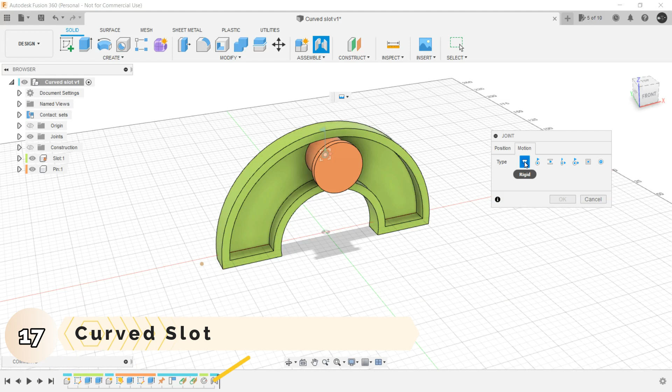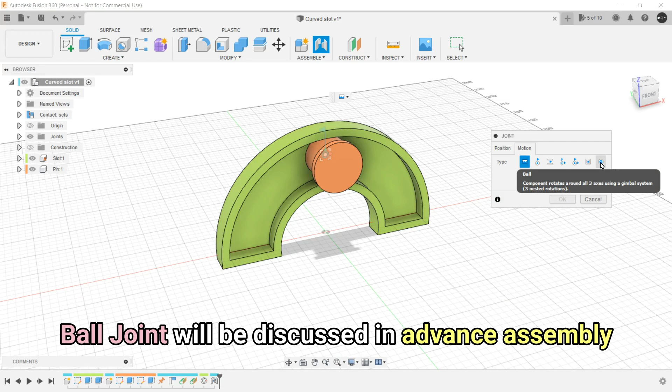So far, we have understood about rigid joint, revolute joint and slider joint while creating some basic assemblies, and then we understood about cylindrical and pin slot joints while creating some intermediate assembly. In the same regard, we are going to understand the planar joint and the ball joint. This ball joint will be covered in the next section where we deal with some advanced assemblies and advanced concepts of assembly in Fusion 360. So let's begin with this one.

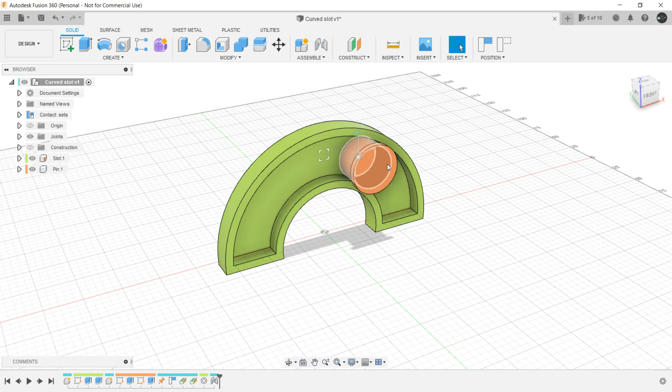As you can see, we are having a curved slot in which a pin is attached which can move in the slot only, and it cannot go outwards of this. So we are going to use the concept of contact set again here.

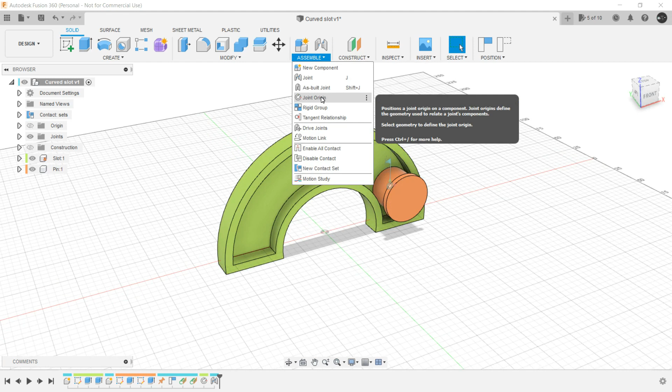Now in this particular lecture, we are not only going to understand about the planar joint, we are also going to understand about one new concept, that is how to create a joint origin. So let's begin. Let's create a new design and a new component.

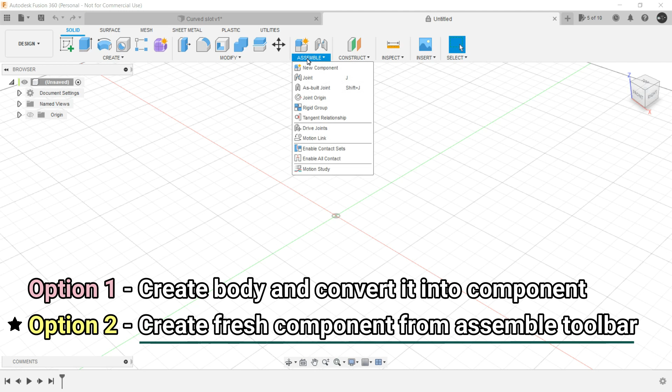I always start with a new component from the assemble toolbar. I can also do it by creating a body and then creating that body as a component, but this is more convenient, more prominent, and more efficient. That's why I use this, and most designers use this method only. They create components, a fresh component from the assemble toolbar. So let's create one. Let's name it slot.

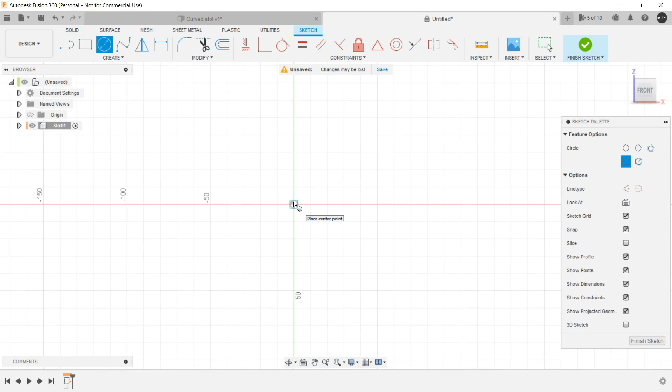Now we are going to create this curved slot first. For this, create a sketch in any of the vertical plane. Then create a circle of any dimension, a bigger one, followed by a smaller one. Then invoke the line command, trace the origin up to the intersection point that we are getting here with respect to the outer circle, and then just close the region.

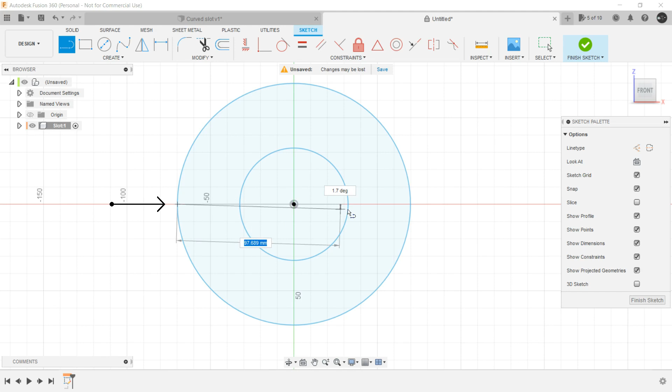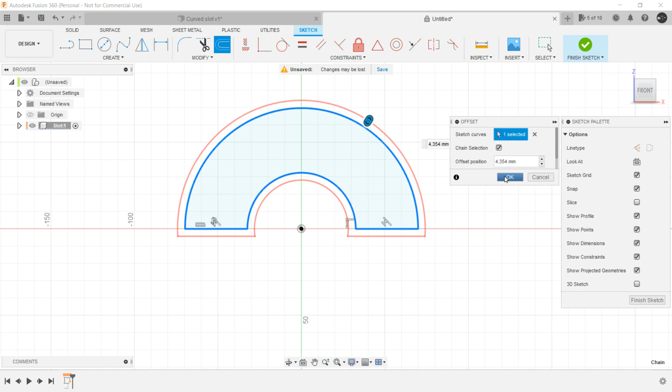Let's trim the bottom area, and this one also. Invoke the offset command by clicking O on the keyboard and just offset this profile that we have generated outside, and click OK. Now finish the sketch, select both of these regions, press pull, push it outwards to any dimension, and as you can see the sketch is gone.

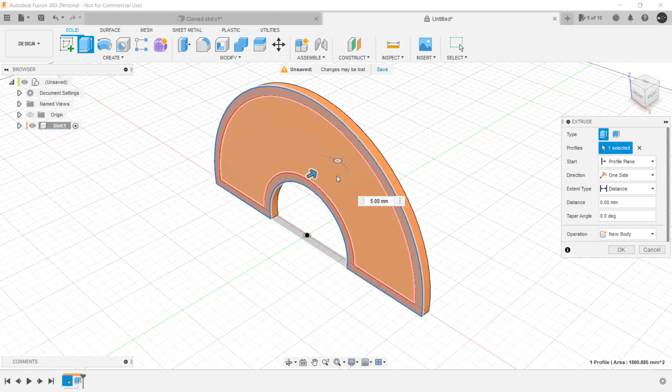So what we will do is show the sketch from here, from the browser. Now select this outer region, press pull, this time here, and the operation would obviously be join. Now just hide the sketch and our slot is ready.

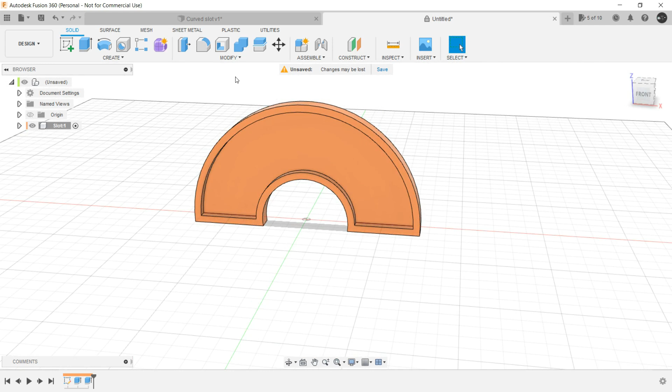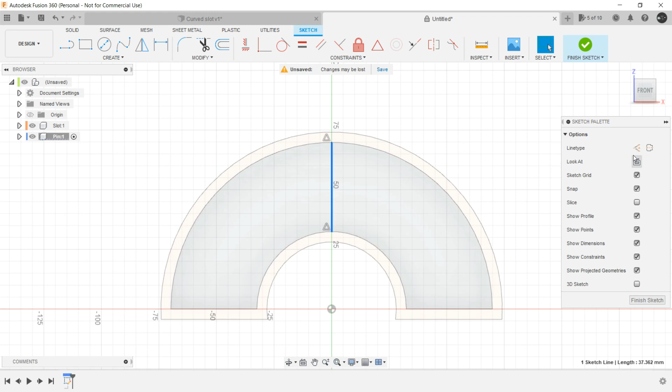Now we need to create a pin over here. For this, again activate the assembly, create a new component, let's name it pin. Select this particular surface, create a circle. Let's first create a line from this midpoint of the curvature and this midpoint, and convert this into a construction line, and from the center of this let's create a circle.

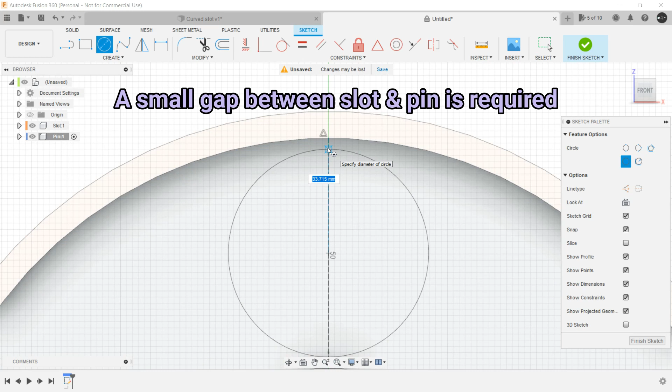As you can see, it is snapping to the point with the outer diameter of the curved slot, but this is not desirable. We need to make it a bit shorter. The reason is we need to have play in between them, otherwise it will be stuck. So it is like 37.362 millimeter, so we can make it like 36 so that we can have play in the upper portion as well as in the bottom portion. Click enter and finish the sketch.

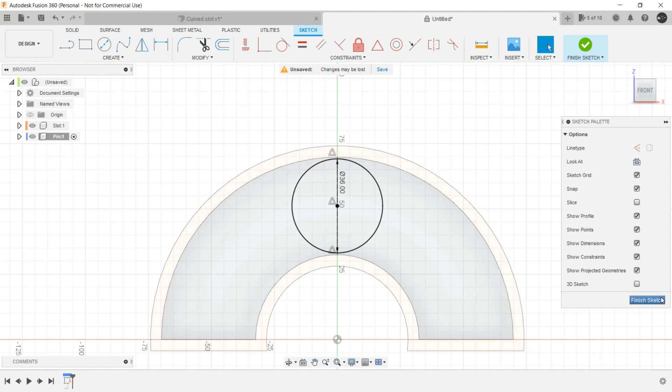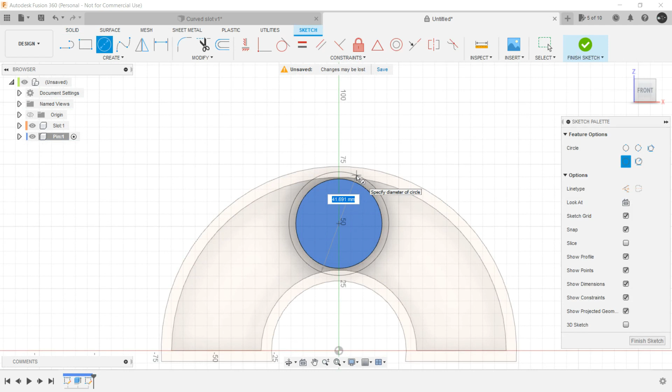Select this profile, press pull. I think this much would be sufficient. And then from this face, create another circle, a bigger one, finish the sketch. Select both of these profiles, right click, press pull, and we are done.

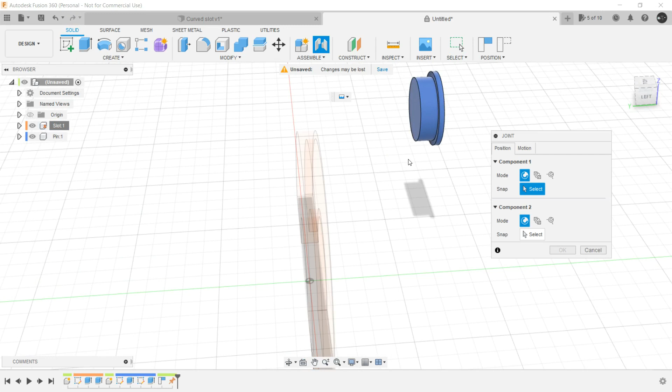Now in this assembly, both components are ready. Now we need to ground any one of them. So obviously this slot is going to be grounded. Just capture the position. This is grounded, meaning we cannot move this one, but we can move this one. And now apply joint. Which one? Planar.

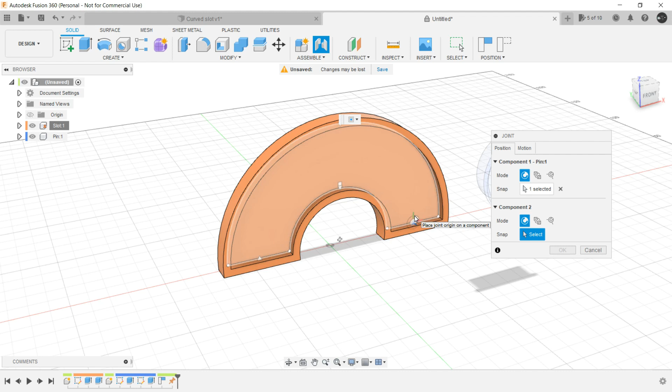Let's go to position, snap to this particular origin, joint origin, and then you need to find a point to snap it on the slot. But as you can see, there is no prominent point where we can snap. Let's say we are snapping it here, and let's try to adjust it, but it is not going to be adjusted properly.

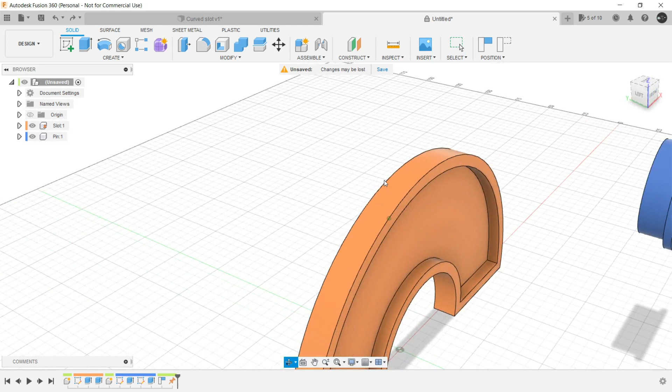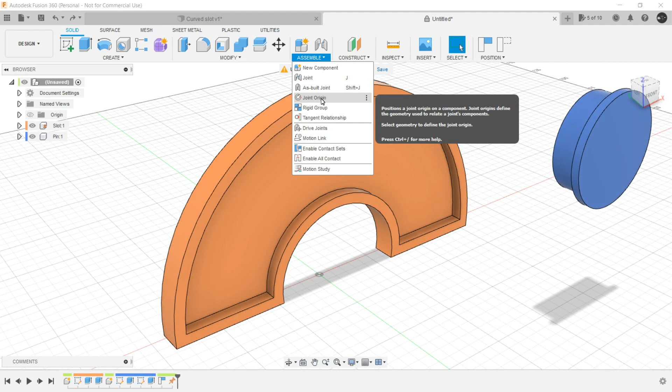Now what we need here is a joint origin where we can create a joint between the components. So for this, go to joint origin. The description in Fusion itself tells you that a joint origin positions a joint origin on a component which defines the geometry used to relate a joint's component. That means when we create a joint origin, it will create a new origin where joints can be applied.

So when we invoke the joint origin, let's capture the position. We have mode as simple, between two faces, and between two edge intersection. When we try the simple one, we cannot snap it to any prominent position, so we have to try something else. The second mode is between two faces. So when we click here, we can select two faces only, but we want our joint origin somewhere over here. So for this we need to make some adjustments.

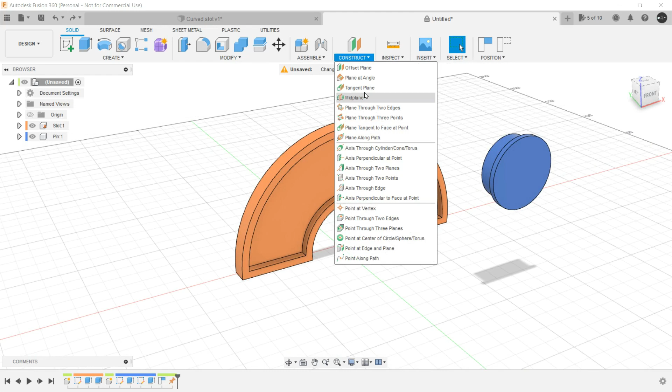Just cancel for now and create a tangent plane on this particular curvature. Similarly, create a tangent plane on this particular curvature. Click OK, and now we can invoke the joint origin.

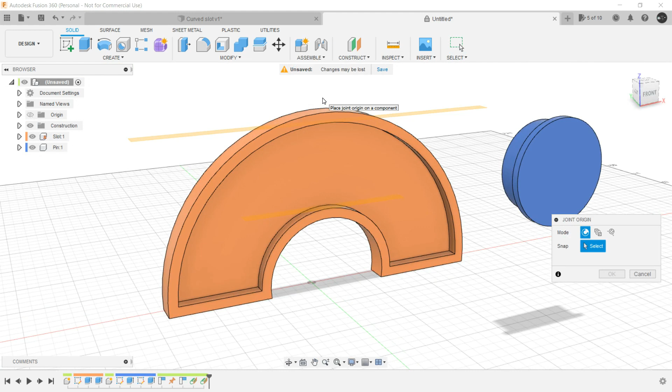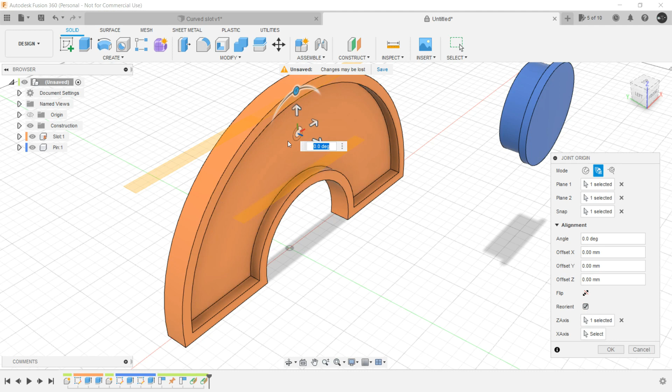Just select the mode as between two faces, select this face and select this face, and we can provide joint origin in between these two faces. But as you can see, it is not oriented properly. It should be lying parallel to this particular surface. So for this we can click on reorient, and then for the Z axis we can select this particular surface and it will be oriented properly. Click OK, hide the constructions, and now we can provide the planar joint properly.

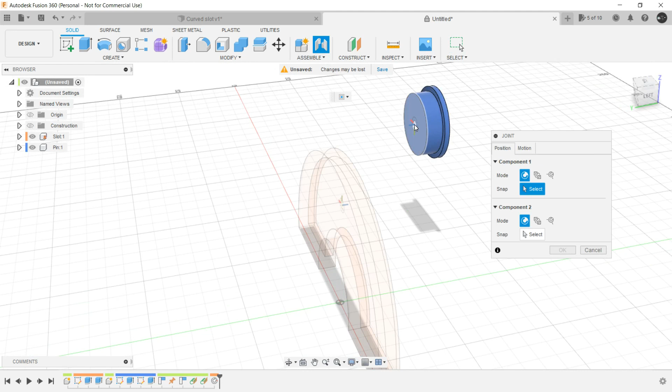Just go to joint. For motion, it's already planar, we selected it earlier. Now for the position to snap, it would be this one and the new joint origin that we have created. Now as you can see, this is how a planar joint works.

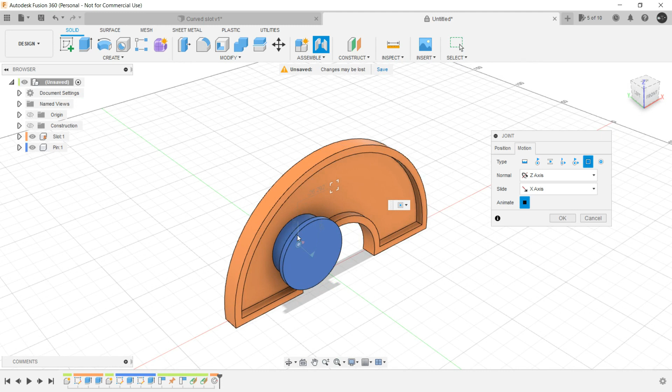Let's click on animate. So what a planar joint does is it moves the component along with the plane in which the joint origin is. So it is moving around the plane in which the joint origin was made. Joint origin was made in this particular plane, so it is moving in that plane only.

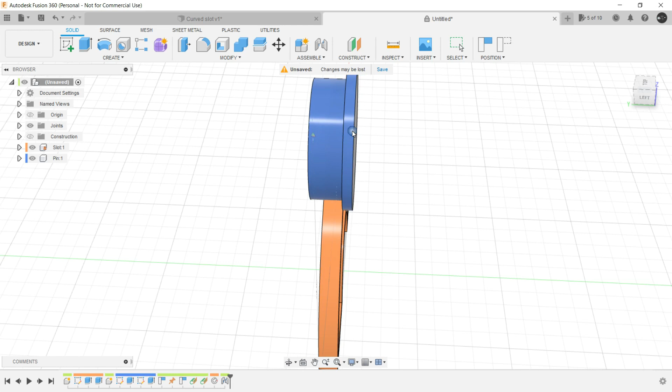Let's revert the position. But what is desirable here is that it should move under this slot only. So for this we will again use contact sets. Just enable the contact sets, right click here and create a new contact set. Select both the components and click OK. Now when you move the pin, it will not go outside of this slot.